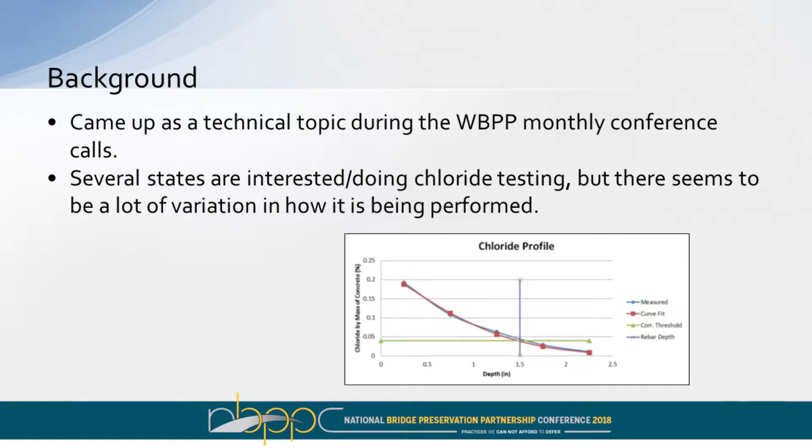So this came from one of our monthly phone calls where we were discussing bridge deck chloride testing, and it became apparent that everybody did it differently and nobody really knew why. And so it was kind of a problem or an issue that came forward that we said, well, maybe we can form a group to answer that question for us, right? I personally am not an expert in this field, even though I'm chairing the group, and I don't have time either. And so if you can pull together a group of experts to do the work for you, wow, that is another benefit of the partnership for sure. And so that's exactly what we did here.

So the scope of work, what we're accomplishing with this group, is we're developing a guide on bridge deck chloride sampling and developing specifications and contract templates that go with it. I'll run through what the guide is, but the idea is to try and develop some consistency on a national scale for something that we're all doing, just doing differently.

I'll run through some of the group members. We have good owner participation. We did start-ish from the West, and so there's definitely a little shift towards more Western participation, but we are represented by most of the partnerships, which gives us a national perspective. Industry, we have a lot of the national experts, literally the national experts are participating in this working group and volunteering their time to do so, and it's really amazing to see how this goes.

I've participated in quite a few working groups. Some of them you're really trying to push and pull to get through and process stuff. Literally every call, even when I did not have much of a robust agenda, I've had to shut down at an hour to respect everyone's time because you start getting all these people together and they get really excited and enthusiastic about the topic, which is a fantastic problem to have.

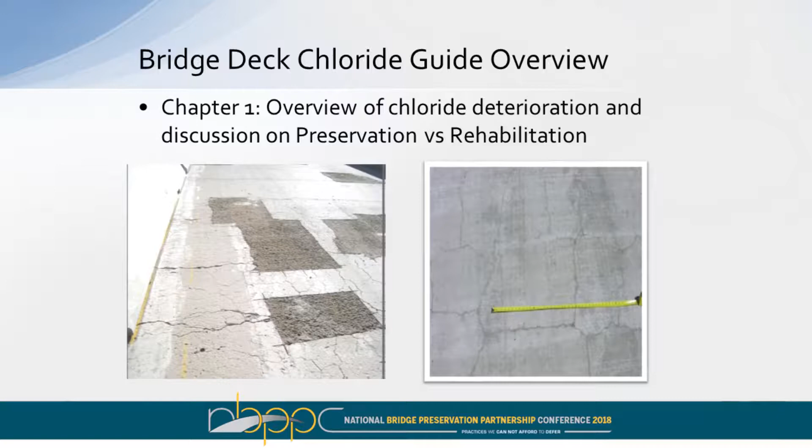The issue is that not many of us are actually doing investigation on the decks when they're not requiring heavy maintenance, right? That's the preservation piece that we really want to start shifting the attention to. You should be sampling your decks that are in good shape, so you know how to have a good management program to avoid having your decks look like that one. And I still have this deck in service, working on getting that bridge replaced.

So chapter 2 is going after network level chloride sampling, right? We can't sample every bridge deck, so how do you pick the ones to sample? And so there's definitely condition-based sampling criteria, right? If your deck looks awful, maybe you should run some sampling on it, but hopefully not. That's going to be your driving force. Environmental factors, maintenance and project history, right? We're covering these things in the report.

Importance-based sampling. If you can't get out and do one of those major rehabs on a bridge deck, if it triggers you to build a detour bridge like Dwayne mentioned to do deck work, well, you probably want to sample that deck, right? You're not going to be able to rehabilitate it, so you better preserve it. Make sure you know where you're at on it. Program management, talking about how to manage some of the sampling data. So that's chapter 2, network level.

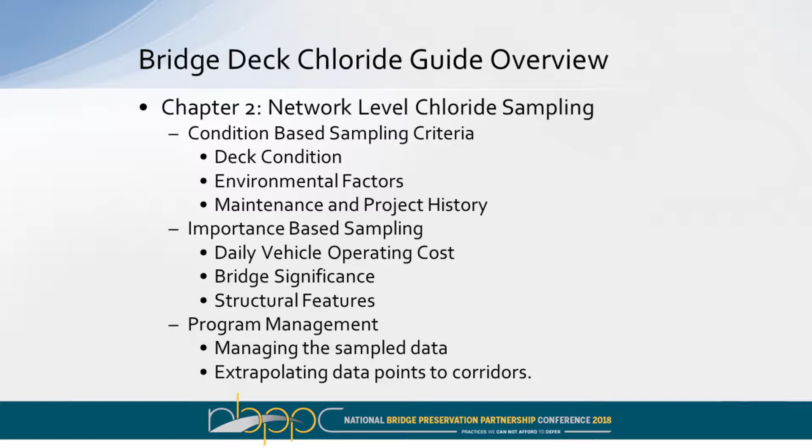So then chapter 3 is getting down to the project level, right? So there was an issue with not having a good sampling methodology, why you were going to sample. And then there were also some issues in how you actually obtain the samples. We noticed there was just a wide scatter in what people were doing. We're not necessarily saying you have to conform to a particular sampling method, but saying that there's definitely pros and cons attached to a lot of different ways, right?

A lot of folks had a lot of background in doing these powder samples, and there's a lot of pros and cons that go with that. Here's doing the core samplings. That seems to be more where we're heading, but providing that project level sampling guidance. So I've identified which bridges I'm going to sample. Now this is the piece to go ahead and do that sampling. Am I doing it in the wheel path? How many samples am I taking? All these kinds of things are going to be discussed in this project level sampling.

It'll also get into the chloride testing procedures, right? There's a bunch of different procedures. I won't pretend to know all the different numbers and standards. I jot them down every now and then on the phone calls when everyone gets excited about using this one versus that one, but it'll be included in the report.

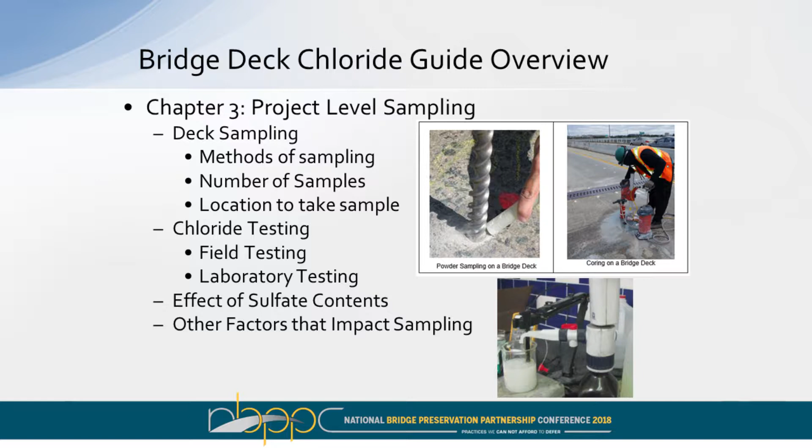Kind of talking about some of the other factors that influence these sample reports that come out. So chapter 4, you found the bridge, you sampled the bridge, you got results from it. Now what do you do with it, right? And so we have a chapter on modeling these test results, how to process the data from chloride testing to obtain diffusion coefficients, and looking at service life prediction.

I would mention that we're not going to get heavy into service life analysis because that is a whole other section of this. One thing we kind of found throughout this process is that there were a whole lot of tangents that we could have gone into that would have really expanded the scope of this report. And we might still get there eventually, but we only started after the national meeting last year, and we're almost to the point of having an actual finished product.

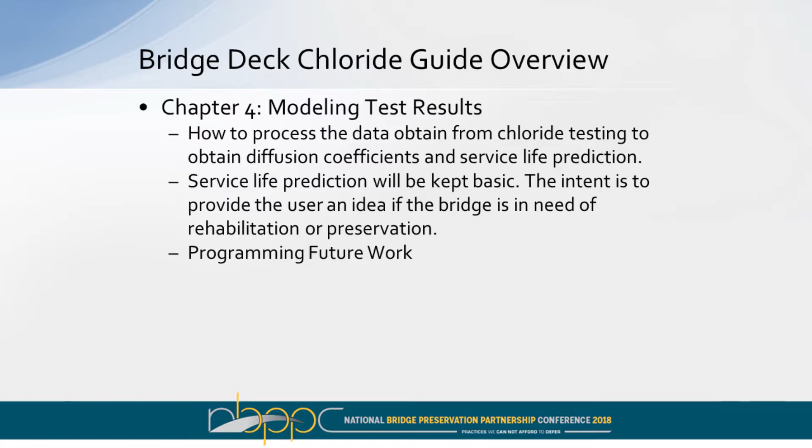And so we really wanted to get to that piece to answer that first question: why are we sampling and how are we sampling? And then kind of moving on there with other stuff. So the pieces on service life prediction and then programming future work are going to be kind of generic. Are you still looking at preservation versus rehabilitation? Those kind of things would be discussed. It's not going to tell you, well, you need to mill off exactly 1.3 inches and then put back a microsilica overlay. It's not going to get to those specifics.

There'll be a couple appendixes on the report. This was some stuff that came up during our discussions that we felt had real value to the owners. I should mention that this report is really written for the owners. This is going to be for the people like myself that manage programs but don't necessarily have an expertise in how to actually implement it. Those folks that are already national experts on how to do chloride sampling don't need another report to show them how to do it. It's really written for those owners that want to start a sampling program but don't know where to go from there.

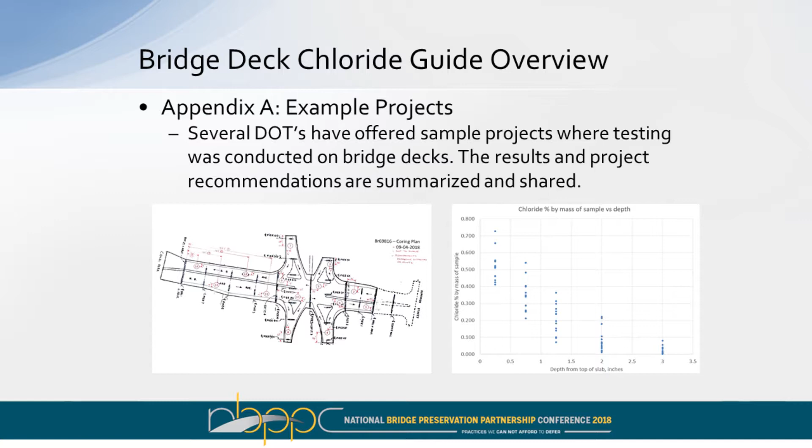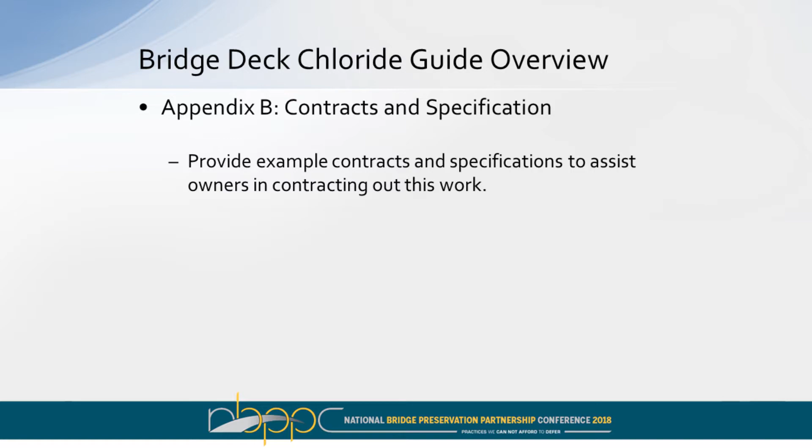Appendix A, example projects. We're going to have a handful of projects that actually show you what someone did and the results from that analysis. And then Appendix B is going to be contracts and specifications, to show an example, since some states do this with in-house forces and some consult it out. We want to provide the information for how to actually put it into a contract. Obviously, each state contracts this a little bit differently, but at least have an example to build from.

So as I alluded to, we're like 95% complete with the draft report. It's almost 60 pages in length. Again, done all on a volunteer basis. We're starting our review process. We're hoping to complete that in the middle of June, so that we have an internal document that we can then share with the 4 regional partnerships. Remember, we want this to be a national report sponsored by TSP2. So even though it's a national working group, we want to still send it out and give time for the various partnerships to maybe include it in one of their monthly phone calls and do a review and discussion if they have any concerns.

We intend to publish it through TSP2, at least through our website, and then also coordinate with MAC for distribution through AASHTO. We talked about TC3, right? The intent is to get the report into as many hands as possible. So we're not really trying to narrow down the scope of who can get access to it. We're trying to make it available through whatever resources we have.

So future work, adding in the contract and specifications piece is one of our 5% we're still working on. We did have a lot of different factors that could affect deck deterioration that came up throughout our discussions. We were very specific. We're looking at decks and chlorides for this report. If we want to start looking at sulfates, carbonation, other factors that could be influencing your deck condition, that could be a spin-off into a new working group, but again, trying to focus on getting something in people's hands. Service life and future project recommendations. That was a huge piece that could have expanded the scope of this report to something that would have been years in the making. And so it still would be something worth doing.